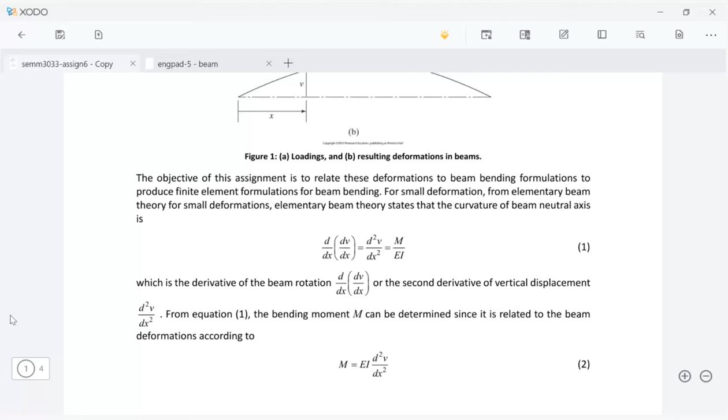So basically, assignment number 6, which is this one here. Let me show you. Let me share this. Assignment number 6 is basically the beam element derivation. So what you can do here is you watch the video and at the same time look at your question, because the answer to this assignment 6 question is in the video. Okay, so my recommendation is to do assignment 6 while watching the video. It will make your assignment easier.

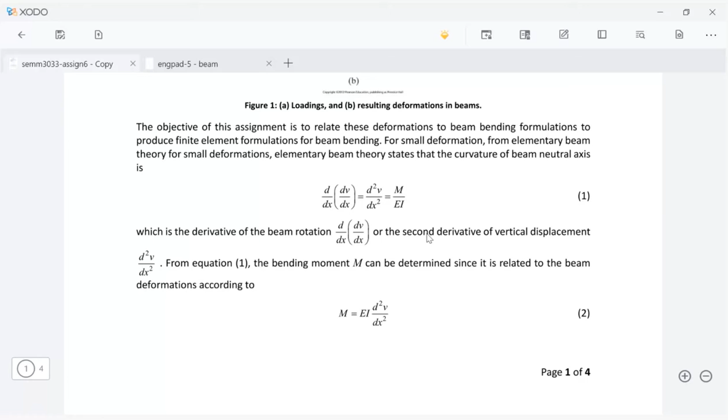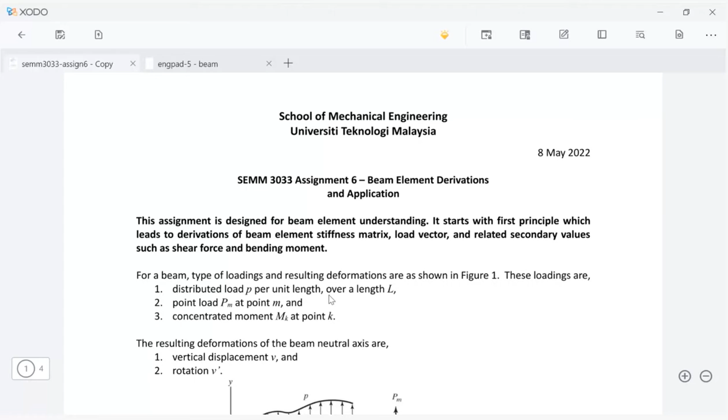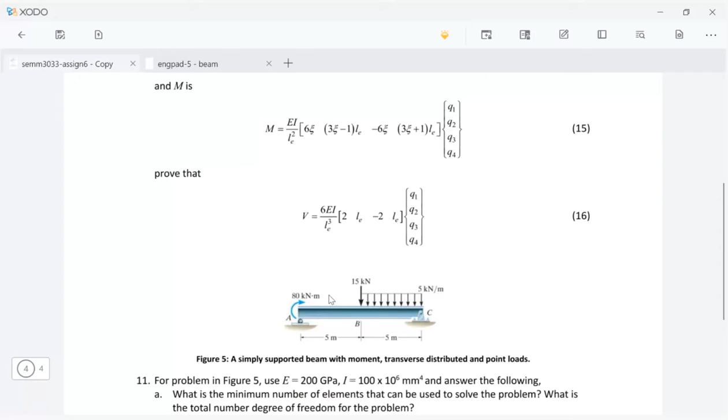So the whole idea about assignment 6 is for you to understand the derivation, because the nature of the problem is kind of different from the bar element and the truss element that we had done before. This is a slightly different approach. But anyway, don't worry, because the video is there. So you can do this while watching the video. And at the end, we have the application. So the first part, from question 1 to 10, is not a question. It's just steps. Step 1 until step 10 is in the video. You can follow through the video.

And question 11 here is the application of what you have derived. So this is the actual question. The rest are just a step-by-step derivation for you to understand what is a beam element. Okay, so that is assignment 6. I already put it on the website. You can just download this, and it is due 1 week from today. Today is the 8th of May, and a week from today is the 15th, before 12 noon. All right, so this is the one.

And the frame element is again from Dr. Nick. I have the assignment, but I have not put it on the website yet. I think we need to do this quickly, because we need to catch up. I believe next Sunday is also another holiday, right? If I'm not mistaken, Hari Wesak. So we miss another lecture. All right, so what you need to do is after this class, please download the software. It's huge, I think 1.8 gigabytes. Please use Wi-Fi. Do not use your phone data.

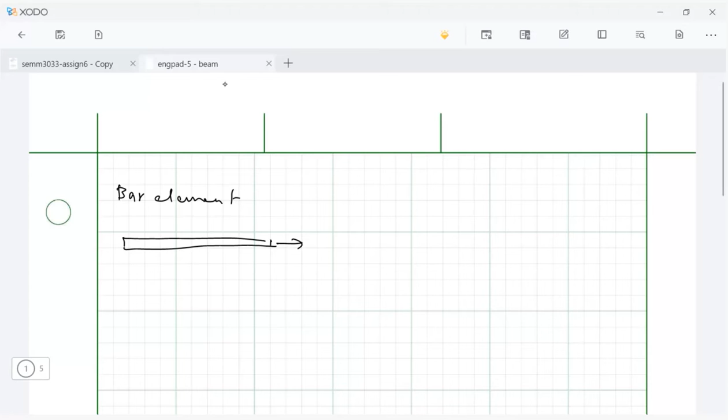So let's say this is node 1, this is node 2, and we have Q1 and Q2. What we have here is a 1D element, the bar element, with only 1 degree of freedom per node. In this case, it's just the displacement of node 1 and node 2. And I think this is on your test 1, which is my question, a very straightforward question actually.

So if you do the review, you should be able to do my test question, because I think it is very, very similar to the review session. All right, so that's the bar element. And then the next thing that we did was basically we have a bar element.

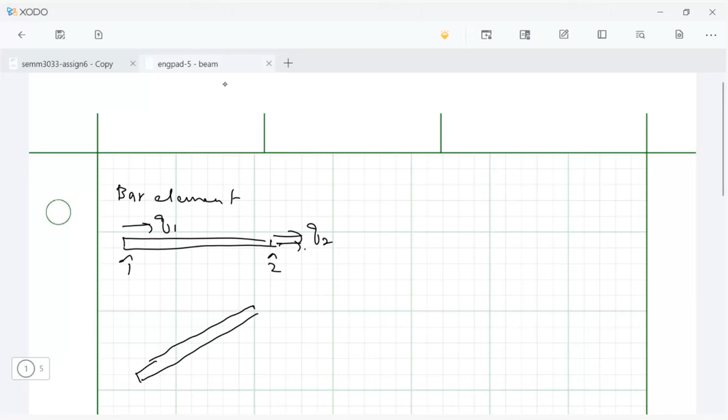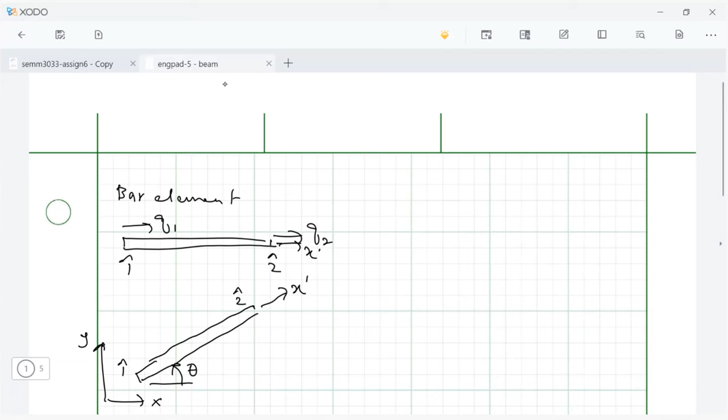So let's say this is our x prime, which is our local coordinate, which is at an angle to our global coordinate system. And this is our angle theta. Okay, and this is node 1. This is node 2. So what we have here is that we have two things here.

We have Q2 prime, which is in the local coordinate system, and we also have Q1 prime, which is in the local coordinate system. And then, because we are interested in the global coordinate system, for node 1 we have Q1 and Q2 without the prime, which means this is using the global coordinate system. And we have Q3 and Q4 for node number 2.

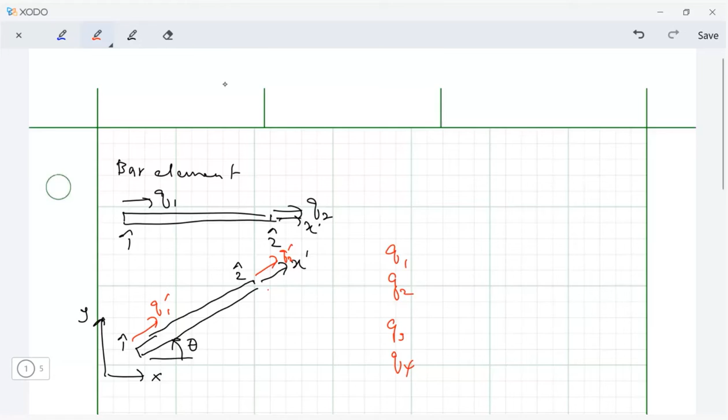Okay, so now what we have is basically at each node we have 2 degrees of freedom. So we move from 1 degree of freedom per node, and when we put the bar element at an angle with respect to our global coordinate system, then we have 2 degrees of freedom. We have displacement in the x direction and displacement in the y direction, right? So this is how we move. And note that, 2 degrees of freedom.

And remember, I think in question number 2, you have this kind of question. And I mentioned that the most important thing is to keep track of your angle, how you measure the angle. If you screw up your angle, then your answer will be screwed up also. Okay, that's the issue. Now, the next thing is what we want to do is beam element.

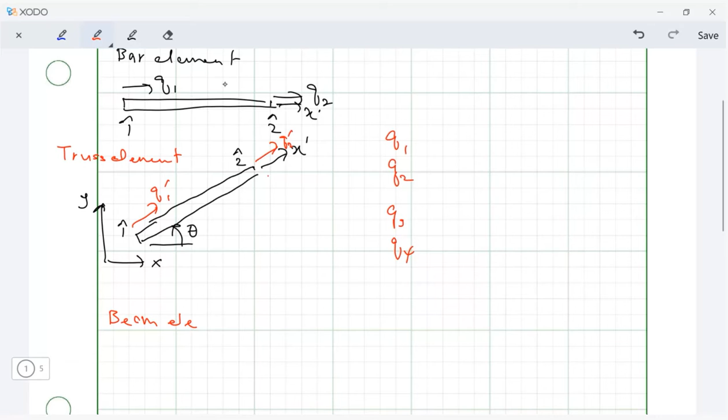So this is bar element. The next one was truss element. What is a truss element? Truss element is basically a bar element at an angle, right? That's it, at an angle. Now what we have is a beam element. So what is the difference between bar, truss, and beam element? What kind of deformation do we have in beam element?

For bar element, what we have is only displacement, right? Also the same thing with truss element. If bar element is either vertical or horizontal, then we have only one direction. But for truss element, when we put it at a certain angle, then we have Q1, Q2, Q3, and Q4, basically our displacement in the horizontal and vertical direction. So basically, bar and truss deformation is just displacement.

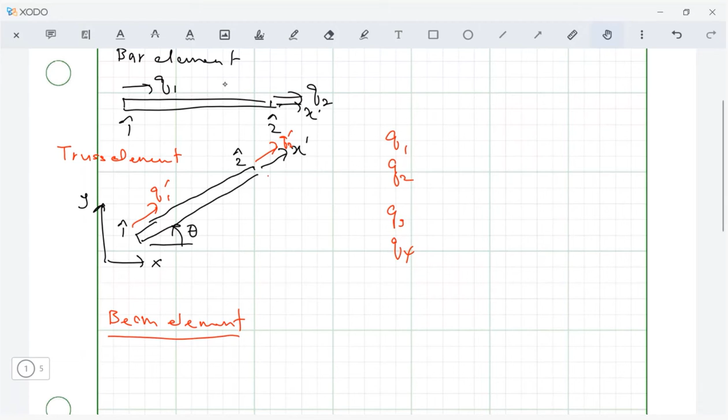What about beam element? What kind of deformation do we have in beam? What do you remember about beam? Formula. Do we have stress in beam? What is the stress in beam? What's the formula for stress in beam? Anyone? Can somebody answer my question, please?

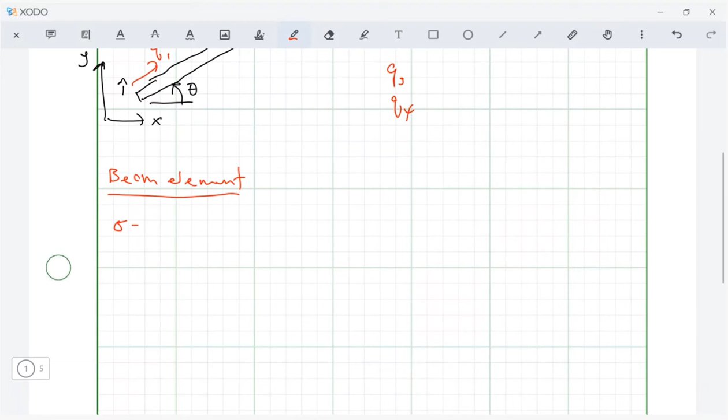So for bar element, we know that our sigma is just E epsilon, right? Where epsilon is just du dx, right? So this is the strain and this is the stress. This is for bar element.

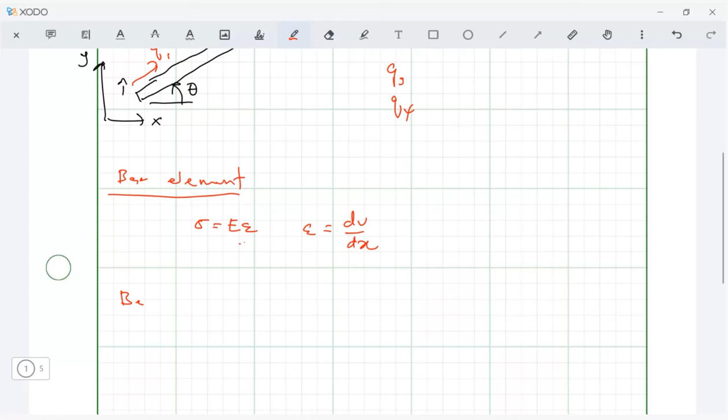So what about for beam element? What kind of deformation or what kind of quantity do we have here? So of course, you have sigma equal to Mc or My over I, right? This is the beam bending stress. So what's the other one?

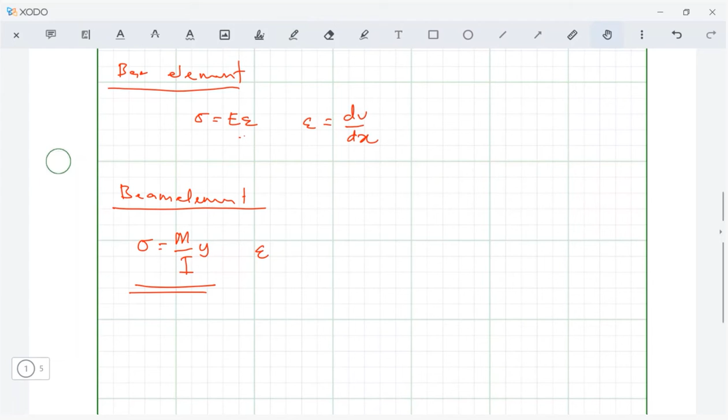And what is the formula for strain then? Do we have strain in beam? We have stress, so of course we will have strain. So in this case, our strain is just sigma over E, or for beam it becomes My over EI. Sigma is My over I, divided by E. So this is our strain.

Okay, do we have displacement for beam? Do you have displacement for beam? Oh, somebody said yes.

Okay. I prefer that you use your microphone, because now it's too quiet. My room is too quiet. My floor has nobody except me. There's no motivation for me to speak. Actually, there's no motivation for me to teach because it's just like me talking to my monitor. So that's why I need you to say something, so I know that you are actively listening to my lecture.

Okay, what happened to my class before this? This morning, when the session ended, I didn't log out. I just stayed there and watched how many of the students had not left yet. There are, I think, a few students who left maybe 15 or 20 minutes after the class ended, which shows that maybe he's not in front. He's not watching the live session at all. He just turned it on and went somewhere else.

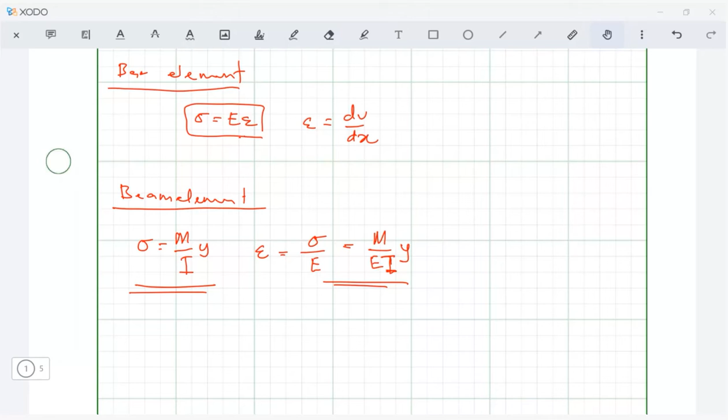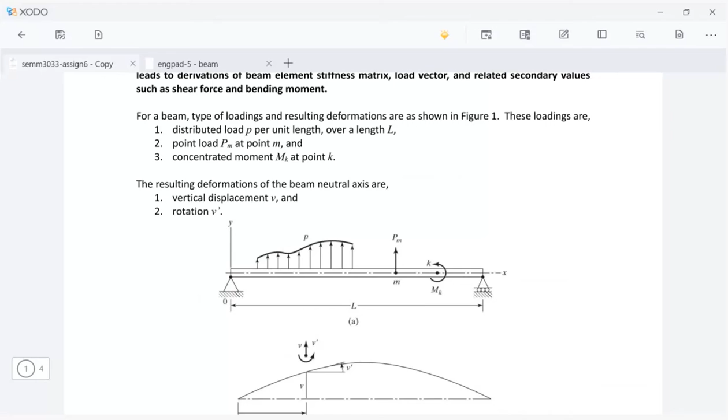All right, so let's look at the question paper here. So this is our typical beam. This is a simply supported beam. And take note that these are the loads. We have distributed load, we have concentrated load, and we also have concentrated moment for the beam. These are the typical loads for our beam.

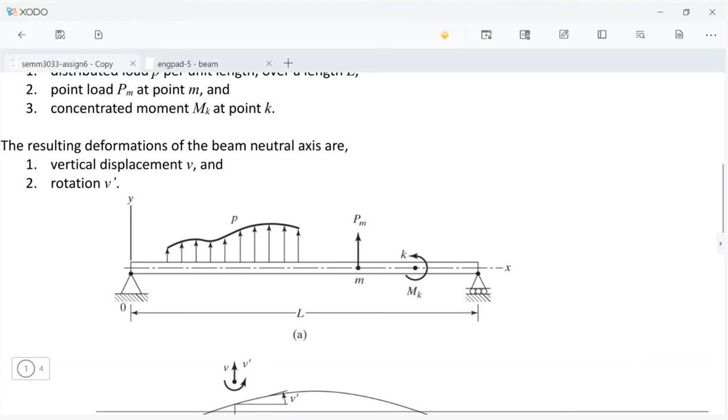Note that in this case, if you read the textbook, it says that this shows that the direction of the loading is positive. Note that positive for the moment is counter-clockwise direction. So for a beam, type of loading and resulting deformation are shown in figure 1. These loadings are distributed load P per unit length over length L, point load PM at point M, and concentrated moment MK at point K.

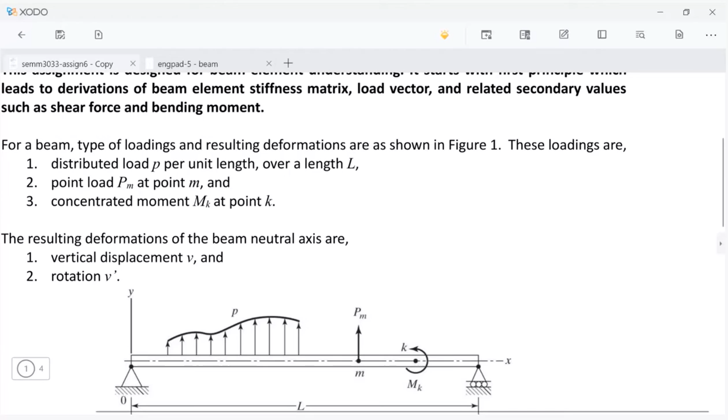So the resulting deformation of the beam neutral axis is the vertical displacement. Note that the load is positive when it is going upwards. So the beam deforms. This is the shape before the deformation, and this is the shape after deformation. Note that this is the neutral axis of the beam before deformation, and this is the neutral axis after deformation.

So note that at any point, in this case at x, we have what we call a vertical displacement. This is our position before deformation, and after it was loaded, it deformed. Basically, the neutral axis moved from this point to this point here. So this is what we call the vertical displacement. It is displaced by the value v.

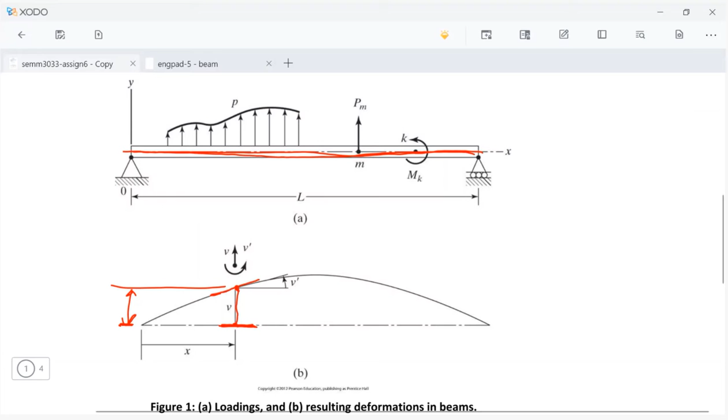And note that initially the rotation of the neutral axis before deformation is this line here, which means it has no rotation at all, or the angle is 0. But after deformation, see that at this point here, the neutral axis is at an angle. So now it has this slope or rotation. So we know that there's an angle here.

Because this is the slope, the slope is just your delta y over delta x. So the slope is just your dv/dx: the vertical displacement with respect to the location of that point. So this is the slope at this point here, just like your dy/dx.

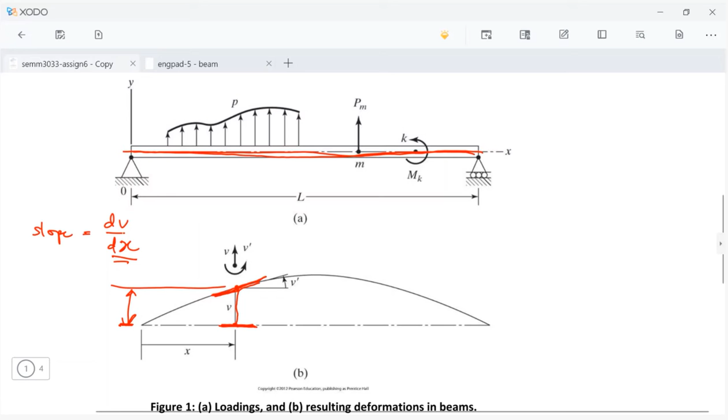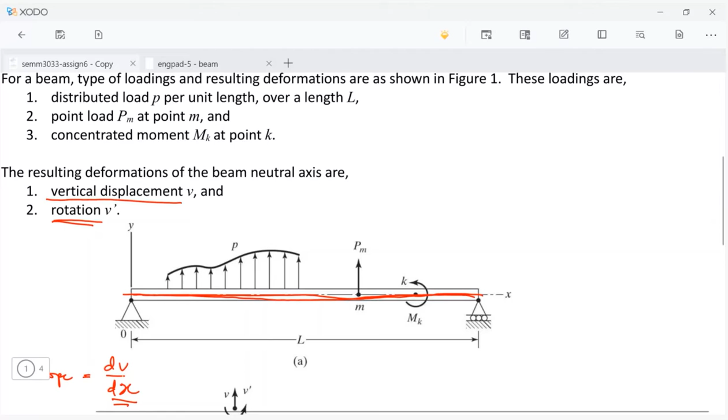So why do we need this here? Because at this point, we know there's a moment and there's also a vertical displacement. So there are two types of deformation here: rotation and vertical displacement. Rotation in this case is dv/dx, or we just say v prime.

So basically, if we know the slope here, we can also find the angle, the rotation. This is why we say this is v prime, the rotation of the beam. Initially it was flat, and then after it was loaded, it has this angle. Basically, it rotates this way. So this is why we have an angle. So v prime is the rotation.

So these are the two degrees of freedom in our beam element. Remember that for the bar element in its local coordinate system, what we have is just displacement.

But for truss, we have displacement in the vertical and the horizontal direction, because the bar element is at an angle with respect to the global coordinate system. So in this case now, what we have is just a beam, which is at a horizontal position, flat. And there are two kinds of degrees of freedom. Deformation in this case: this one is the vertical displacement, and this one is the rotation.

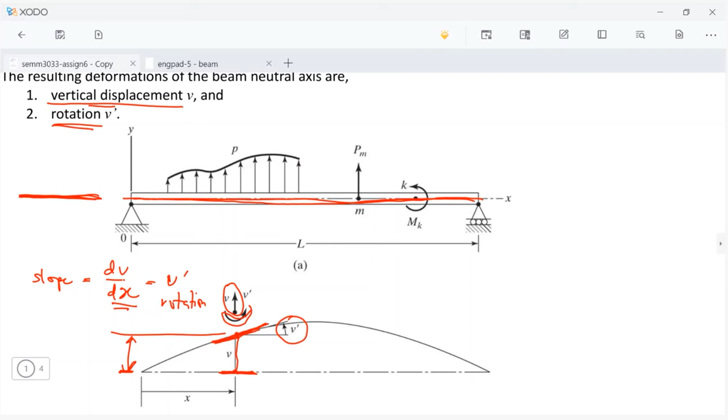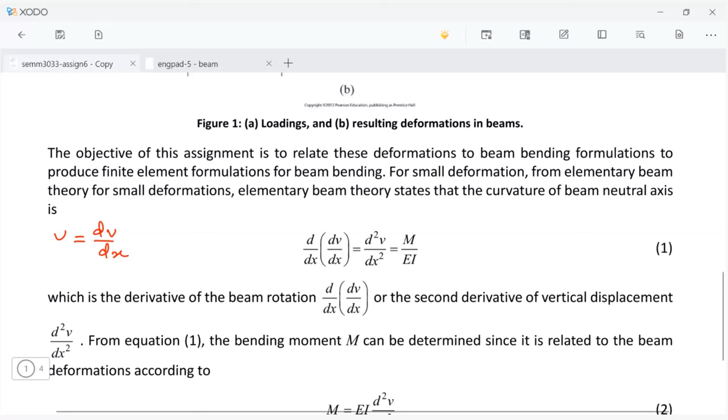So in this case, slope, and this is what we call rotation. So now, if you read carefully, this is kind of your guidance. I put this for you for guidance. So we know that dv/dx is just our rotation, but the rate of change of your rotation is what we call the curvature, and this is just simply d²v/dx². This whole thing, the result of dv/dx, d²v/dx², is what we call the curvature.

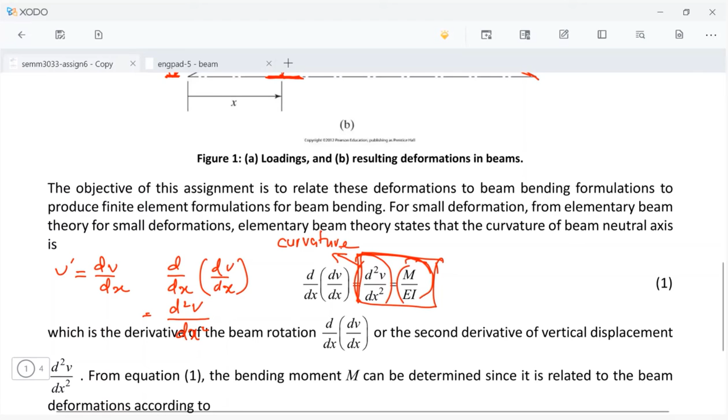Curvature is basically the shape of the beam, like this. So this is the curvature. So the curvature is related with this M over EI. This is from beam theory, from your solid mechanics, maybe Solid Mechanics 1. So this is your curvature. And from this relation, we know that our moment is this.

Note that E is a material constant, which is Young's modulus. I is basically, what is I? Anybody? What is I? I stands for... Anyone? Anyone? Is anyone still on the screen listening to me? Yeah, okay. So what is I there? Second moment of area. Second moment of area. Alright, never mind.

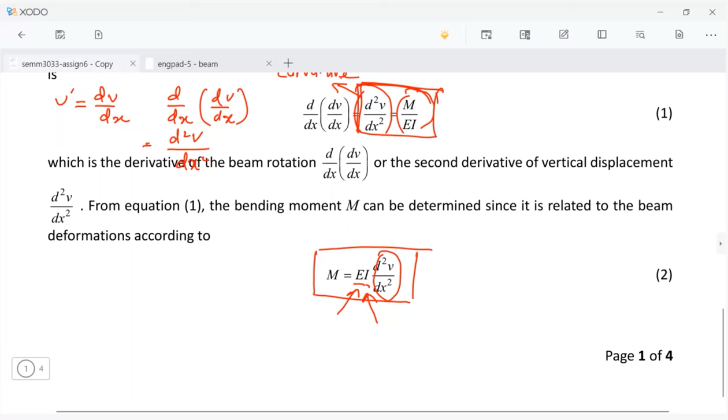I'll let you check. Okay, so because we know that M over EI is d²v/dx², this thing can be found from the geometry of the deformation. So we know that the moment is just EI times d²v/dx². So note that from our analysis here, we know what is v prime, which is just dv/dx. And once we know dv/dx, we can find d²v/dx². And once we know d²v/dx²,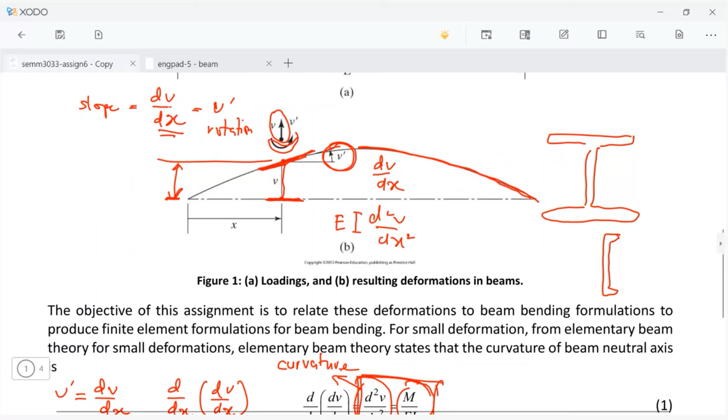we can find the moment given that we know the material properties and also the I, or the geometric properties of the beam. For example, if we are using an I beam, there's a table to find the I for this kind of shape. This is the geometric part. We also have C channel, for example, then we know what is the I, and E and so on. So now, from this deformation, we can find our moment.

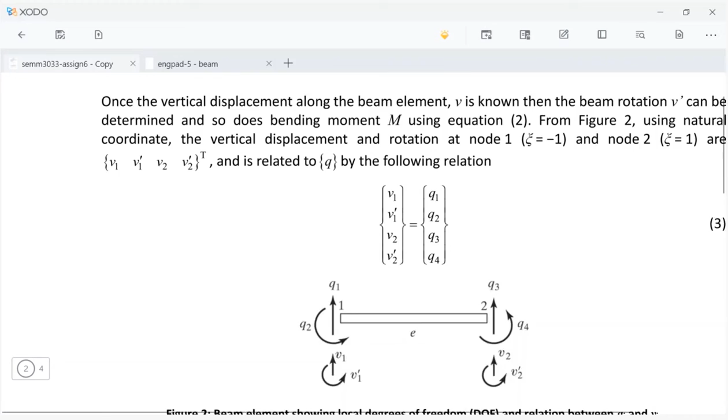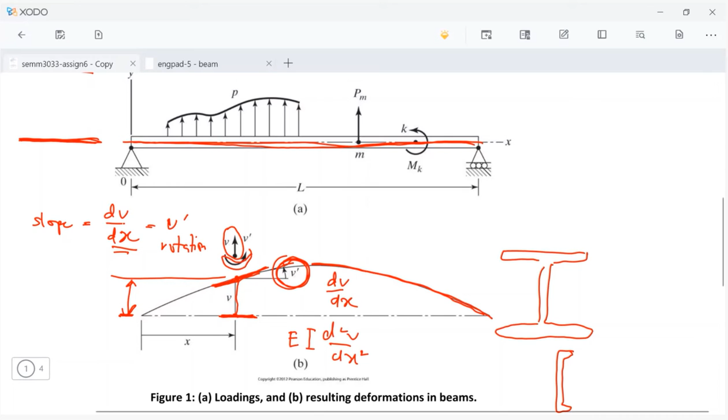Right, so let's go on and note again that the deformation we have for our beam is only two: rotation and vertical displacement. And because of that, if we cut our beam into smaller pieces, because we want to do finite element, we know the degrees of freedom of the beam. This is our element, node 1 and node 2. We have the vertical displacement going upward as positive, which is Q1, and then rotation at node number 1, defined as Q2, the second degree of freedom for node number 1.

And again, counterclockwise is positive. The same thing for node number 2. The numbering is similar to our truss element. In this case, odd is always for the vertical, and even is for the rotation. So note that this is just the vertical displacement at node number 1, and this is dv1/dx. So instead of using this, we map it to q1, q2, q3, and q4.

So this is the notation. This is the degrees of freedom, and this is the deformation. This is the vertical displacement at node number 1. This is the rotation at node number 1.

Okay, noted by this prime. The same thing for node number 2 here. This is the vertical displacement, and this is the rotation. Okay, so we map it by using this. So this is just Q1, Q2, Q3, and Q4.

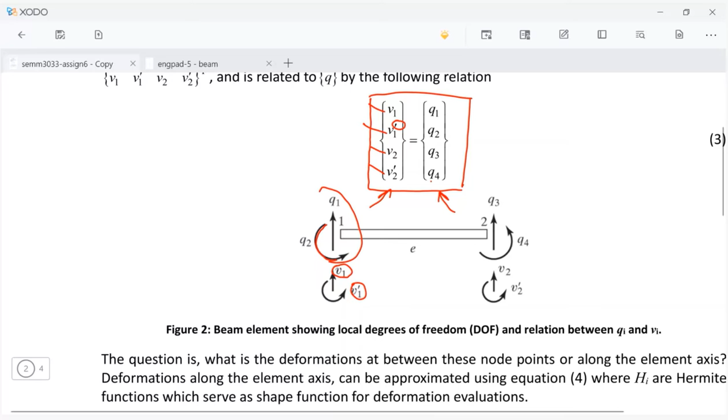All right, so how many degrees of freedom do we have for our beam element? We have 2 degrees of freedom for each node. Okay, and now it is not anymore just displacement. This is displacement and rotation. From the rotation, we can determine the moment. Okay, so we know what is the moment.

Moment is just EI d²v/dx², which is this one. And once we find M, can we find the stress? Remember that stress is just M over I times y. Okay, so once we find the moment, we can find our stress.

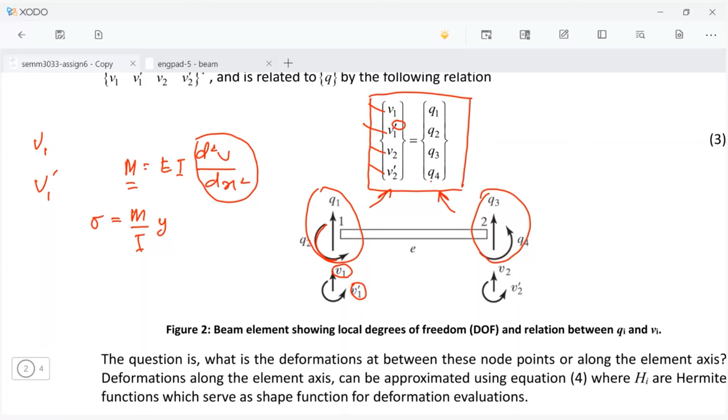Note that in this case, what we can get directly is v, V1 for example. But once we get V1 prime, which is equal to dV1 over dx, to find the moment we need to differentiate one more time. Remember this? We have to differentiate twice to get our M. So it requires a lot more work than the bar element or truss element.

So again, back to the bar problem. Remember that this is our Q2, this is our Q1. So this is node 1, this is node 2. This is straightforward, right? And remember that I told you that in finite element, we can find the displacement at only the nodes. What about at this location? Let's say alpha here. So how do we find Q, or displacement, at point alpha?

I think this is part of the test question, right? The test question asks you this. So how do we find alpha here? What do we need to use to find the displacement at the point alpha? Anyone? Shape function, right?

Shape function. Remember that u, for example, is just N1 q1 plus N2 q2. And note that we have 1 degree of freedom at node number 1, and 1 degree of freedom at node number 2. And this is a simple function. N1 is 1 minus ξ over 2, and N2 is 1 plus ξ over 2. So this is the shape function here.

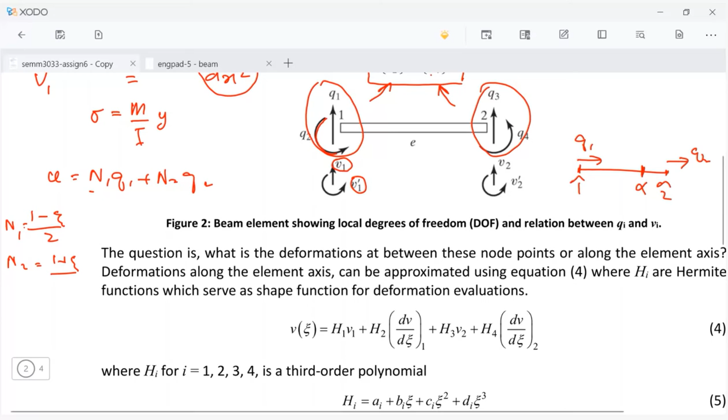But now, take a look at this. Let's delete all this, too crowded already. Okay, so now my question here is, what is the rotation and the vertical displacement at, let's say, this point, beta? How do we find the vertical displacement and rotation at point beta? Anyone?

So remember about interpolation. I mentioned last time, a shape function is basically an interpolation function. We know one value on the left hand side and the other value on the right hand side, so we just use an interpolation function, which in finite element we call a shape function. So in this case, again, we need to use a shape function, but is it going to be N1 and N2 again, or something else?

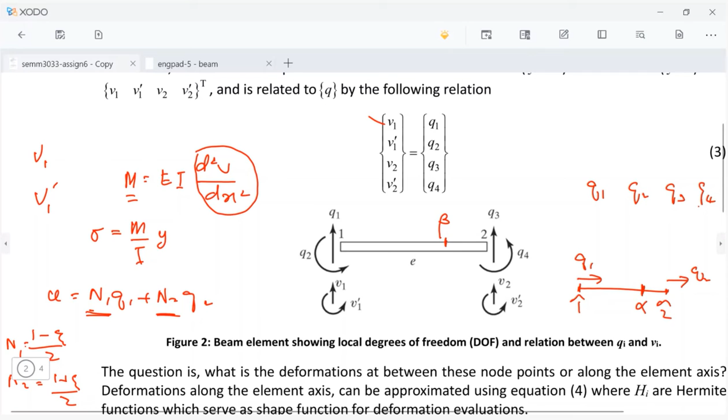So we know that, let's say this is V at point alpha, beta, it's going to use V1, V1 prime, V2, V2 prime. So again, what we need here is N1 and N2. But now it is not anymore only two functions, we have more functions now. So N1 and N2 is the shape function. N1 is one function, N2 is another function, only two functions. In this case, now we have four functions.

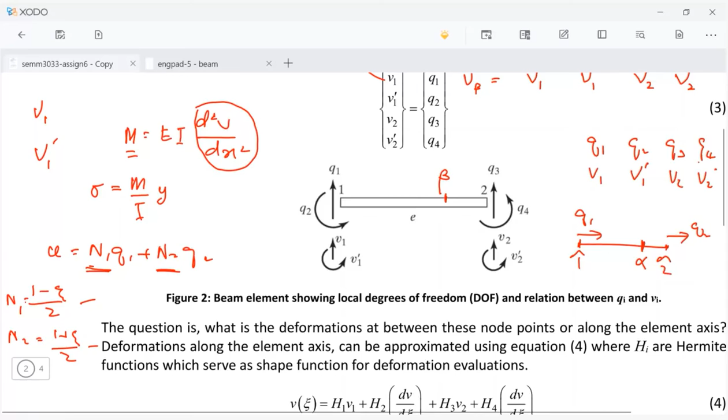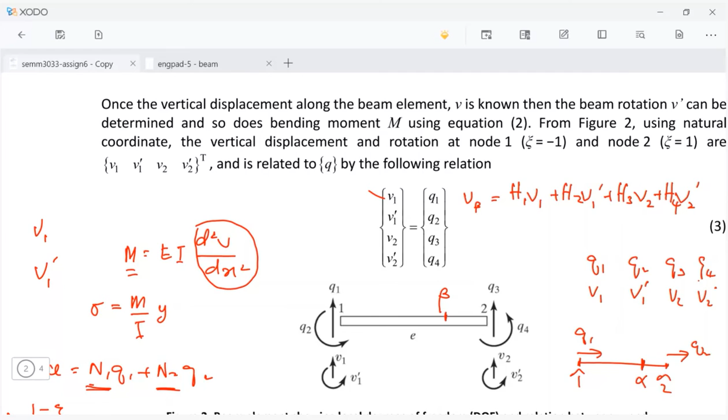For this kind of thing, note that we'll be using H1 plus H2 plus H3 plus H4. Okay, so now we have four shape functions that we need to use. The question now is what is H1, what is H2, what is H3, and what is H4? That is the question. And this is part of the question. Note that we are using local coordinate.

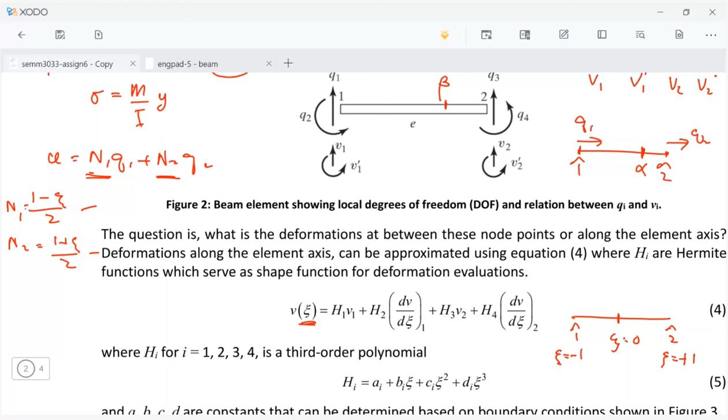We are using local coordinate in terms of ξ because of our beam. So this is node 1, this is node 2. This is ξ equal to 0, this is ξ equal to -1, this is ξ equal to plus 1, right? So this is still a 1D element, but with different degrees of freedom. So now the question is, what is H1, H2, H3, and H4? So now I have given you the clue here. It must be this sort of

function, a third order polynomial, because we have four known values. If you remember from your numerical methods, the degree of polynomial depends on the number of your known points. So for example, if you know 2 points, then your polynomial is order 1. So it is always one less than what you know. In this case, we have 4 known values, and the order of polynomial will be third order.

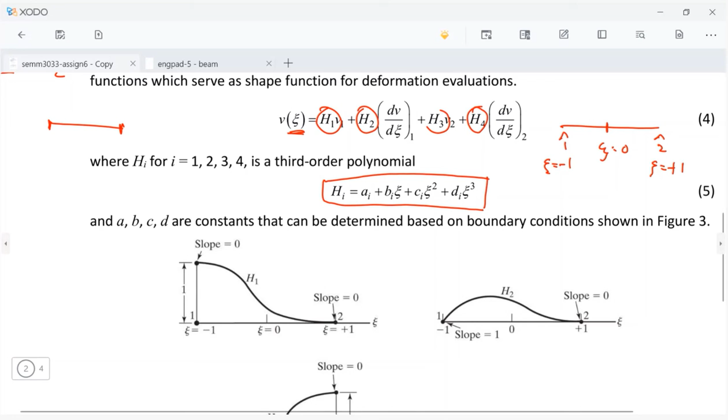Like this bar element, we know two values, q1 and q2, and the order of the polynomial for the shape function is only 1, which is linear. But in this case, h1 until h4 is going to be a third order polynomial. So these are the requirements. For h1, vertical displacement at node 1 is 1. Vertical displacement at node 2 is 0, just like your n1. n1 is 1 at node 1, but n1 is 0 at node 2.

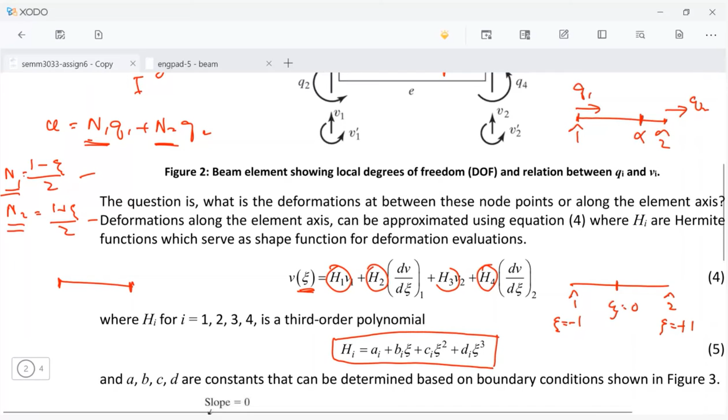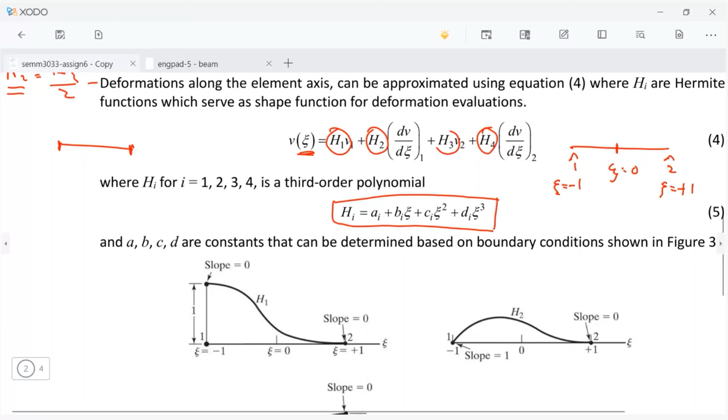The same thing here. And because h1 is only for vertical displacement, there's no slope, there's no rotation. So the slope at node 1 is 0, the slope at node 2 is also 0. Note there are 4 boundary conditions here: one, displacement is 1, two, three, four. So now there are four unknowns and there are 4 conditions. Can we find what is H1? Of course, we can find what is H1.

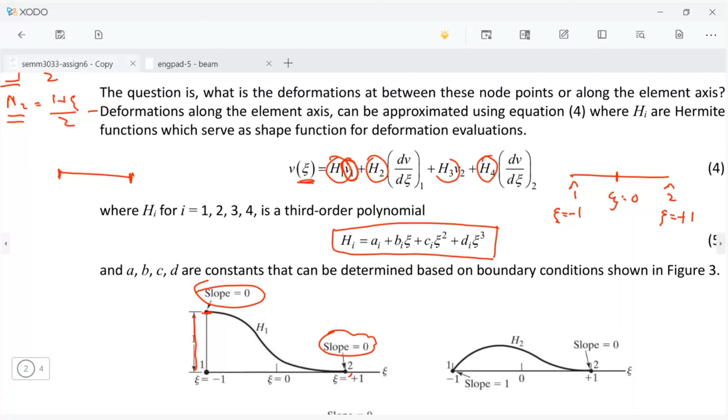All right, so the same thing with V2. This is for V1, this is for V2. For V2, again, this is just for the displacement, so the slope is always 0 at both nodes. But for V2, node 1 is always 0, but node 2 is plus 1, just like our N1 and N2. But now look at this. This is V1 prime, and the requirement is that the slope must be 1 at node 1. This is slope 1. And the slope at node number 2 must be 0, must be flat.

And look at the displacement at node 1 and node 2 for V1 prime. Because V1 prime is a slope, it's not a displacement. So that is why the displacement here is 0 and the displacement there is also 0. Again, this is V2 prime.

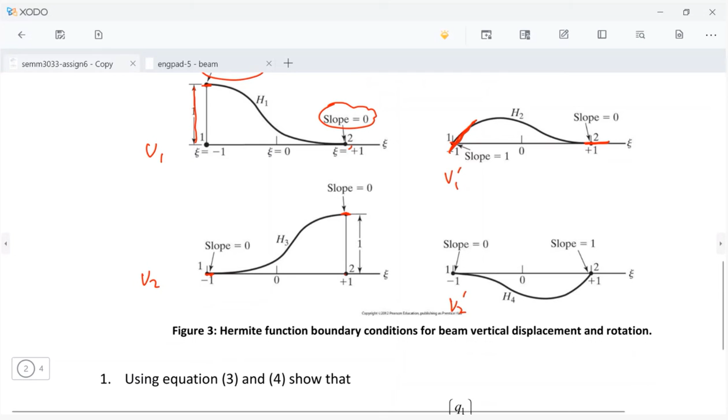Again, we have 4 boundary conditions to solve for H2, because it is in the form of, in this case, A2, B2, C2, and D2. So we have 4 unknowns with 4 boundary conditions. Then we can find what is A, B, C, and D. Again, the same thing here.

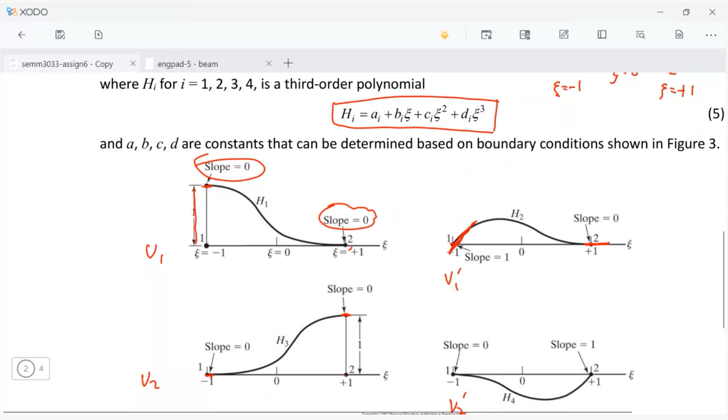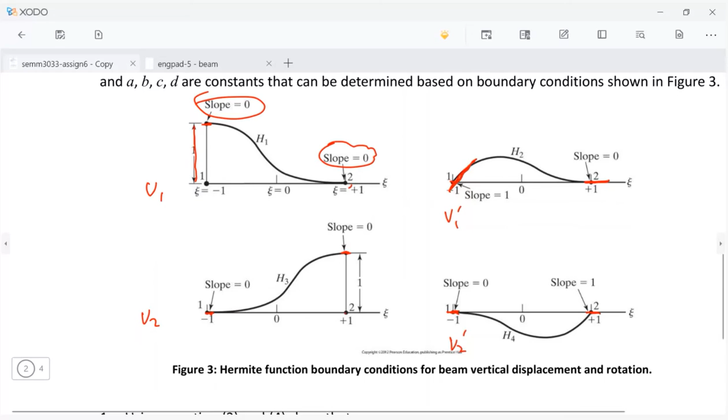This is V2 prime, which is, again, there's no displacement. The displacement is 0 here. But the slope at node 1 is 0. The slope at node number 2 should be 1. This is positive 1, because this is going upward. Okay, so these are the requirements.

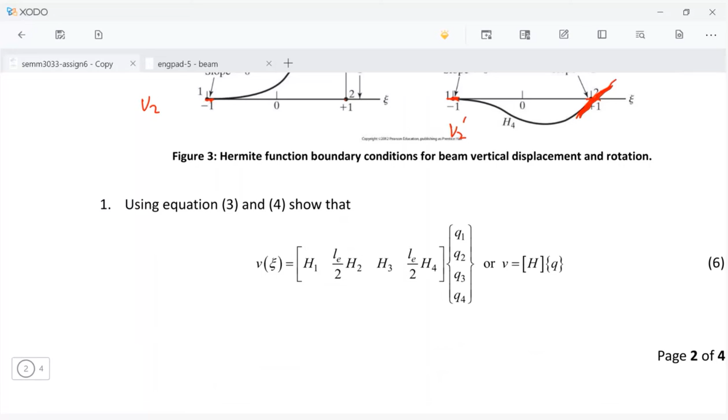So if you derive it carefully, you can get all these values. And I think it's in the textbook for H1, H2, H3 and H4. It's in the slides and it's also in the textbook. Okay, so I think time is up.

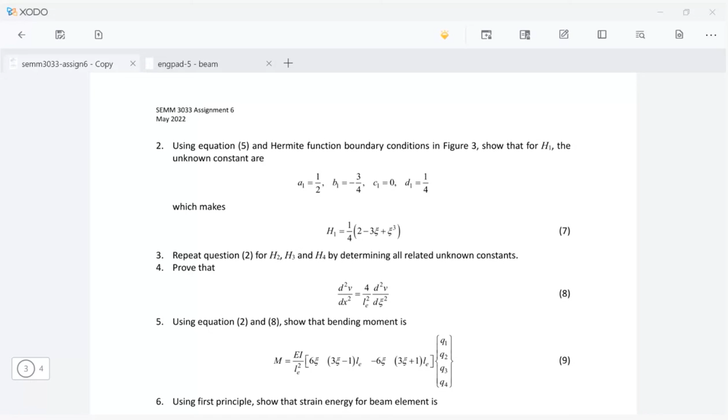So what I need to remind you is that you need to do this. There's a homework here, which is this one here, beam element. So again, question 1 until 10 is just the derivation. It's in the video, it's in the textbook. But question 11 here is the application.

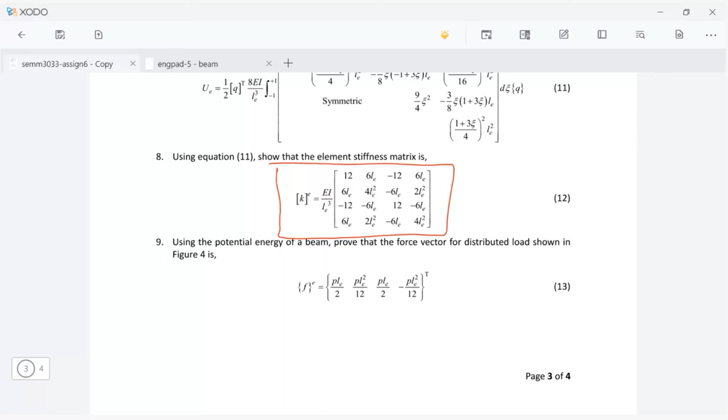Take a look at the element stiffness matrix. It is 2 degrees of freedom per node. Then we have 4 degrees of freedom per element. So the matrix is a 4 by 4 matrix. And, again, just like the truss element. So you need to show me this.

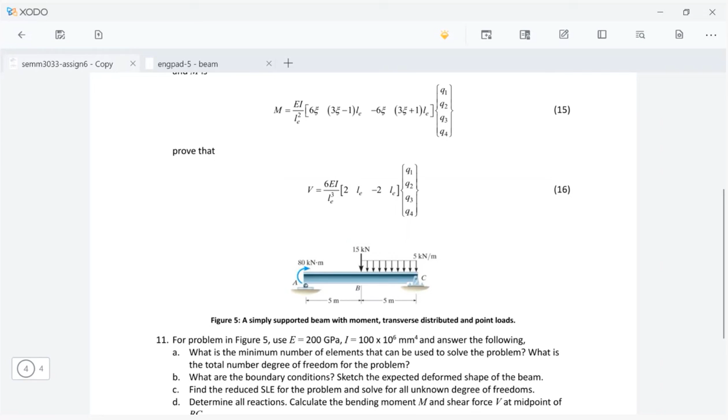All right, so again, the derivation of your K matrix. And again, this is based on your potential energy. Tak salah saya. Based on your potential energy. So once you know what is your K, of course, you can find your K global. And once you find your K, just like our bar element, you can find your force vector.

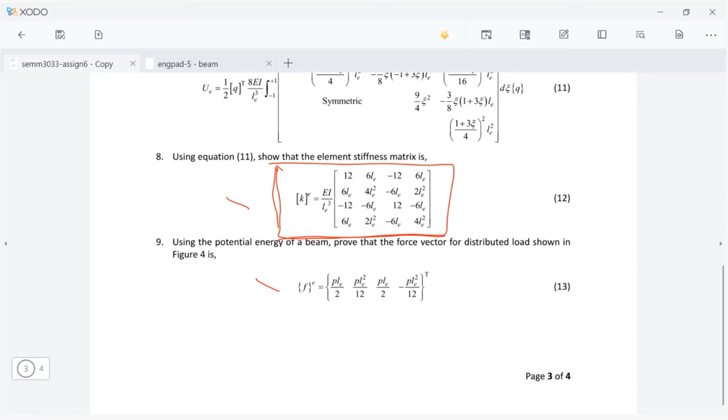What kind of forces do we have here? We have 3 kinds. We have distributed load, we have concentrated load, and we have concentrated moment. So this is for distributed load. And I didn't show how to get for the point load and point moment, which is applied at the global matrix, because it is not based on the element, it is based on the global matrix.

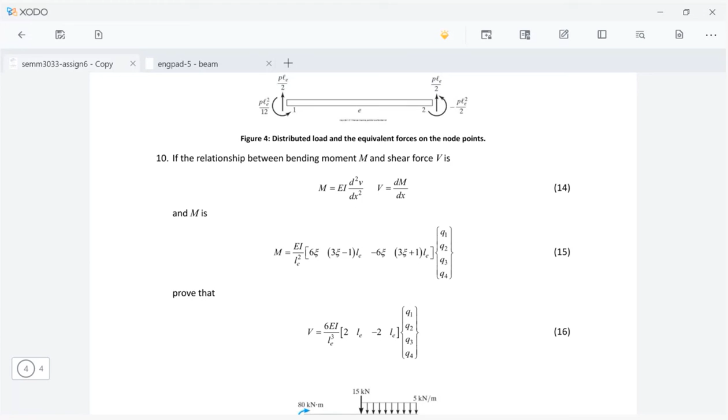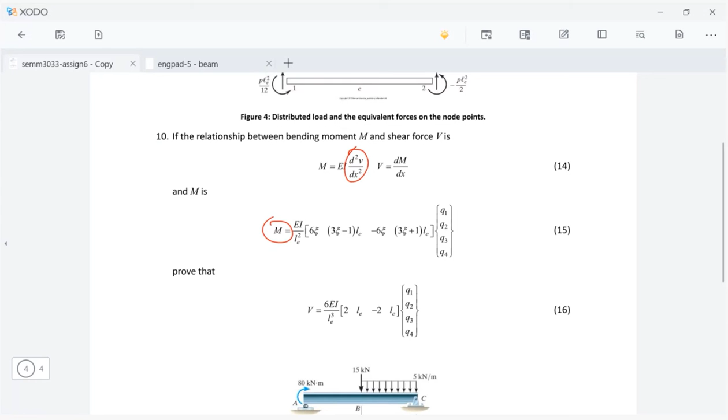And once you know what is the d square v dx square, you can find your m. Then once you know m, because V is the shear force, you can find your V.

A soft copy of the textbook? No, I don't have it, sir. I think you are smart enough to find the textbook. I told you the first day of class, you need a textbook. I don't care how you get it, but you must have a copy of your textbook. Hard copy ke, soft copy ke, pinjam kawan ke, pinjam library ke, but you must have a copy because this is your source of reference.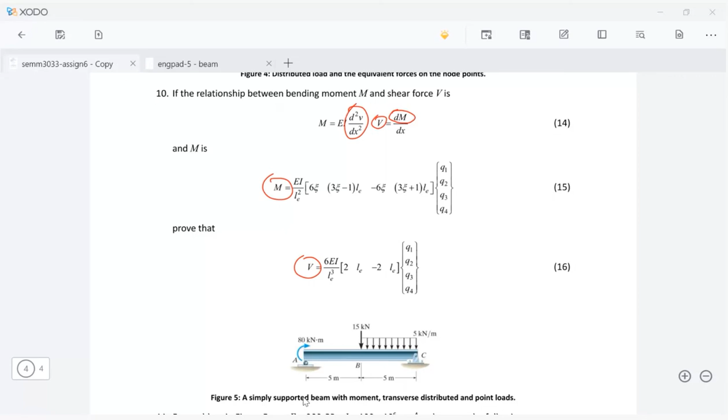I think I gave to you during the first day of class the list of what we need. I don't remember. Let me open up. This one. I think yes, this one here. I say here, textbook here.

I told you during my lecture, please have a textbook because this is your reference. The slide is not good enough because it is just a summary. Sometimes it skips a lot of things. So you might be clueless on the jump. So please read the textbook.

And remember, I told you also about the textbook because I talked about this in the SLT lecture, student learning time and the Bloom taxonomy. So please find a textbook, buy, pinjam kat library, pinjam kawan, pinjam senior, tak kisah, but you must have a textbook.